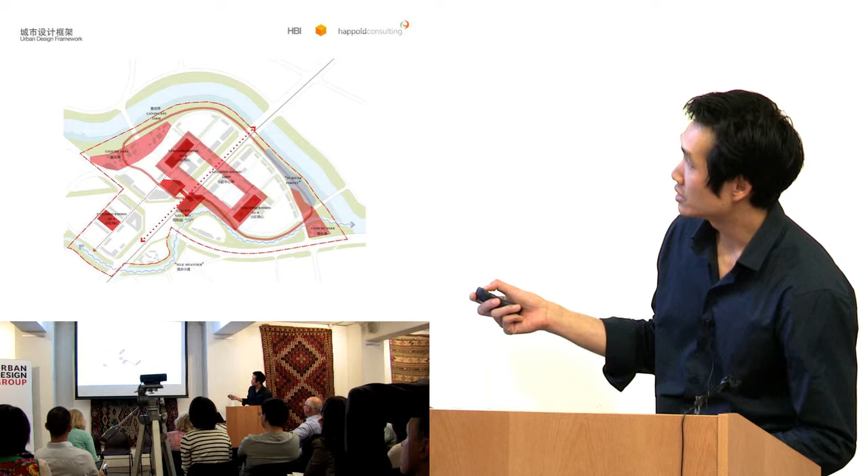Here's where we are on the site. At the confluence of two rivers, the loop, the three neighborhoods, and the metro station as the kind of conceptual bones of what we're trying to do here.

So running quickly to the CGIs, and not dispensing with the 200-page report.

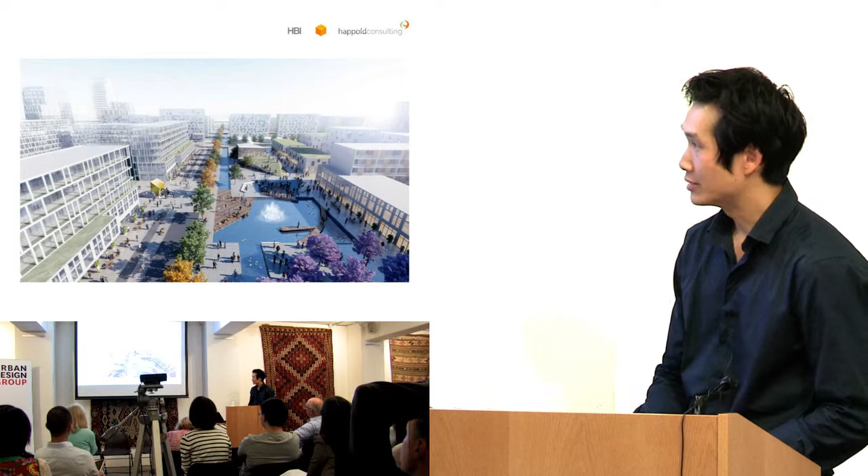This is one of the neighborhood hubs that we were trying to create, and each of the neighborhoods had a neighborhood hub where we reclaimed land for speculative development and safeguarded, or attempted to safeguard it for community use. This is where we pooled kindergartens and nurseries and wet markets, restaurants, in order to provide an interface for residents. And we recovered value by balancing the density on the neighboring parcels of land, which we think will increase in value because they have amenity like this.

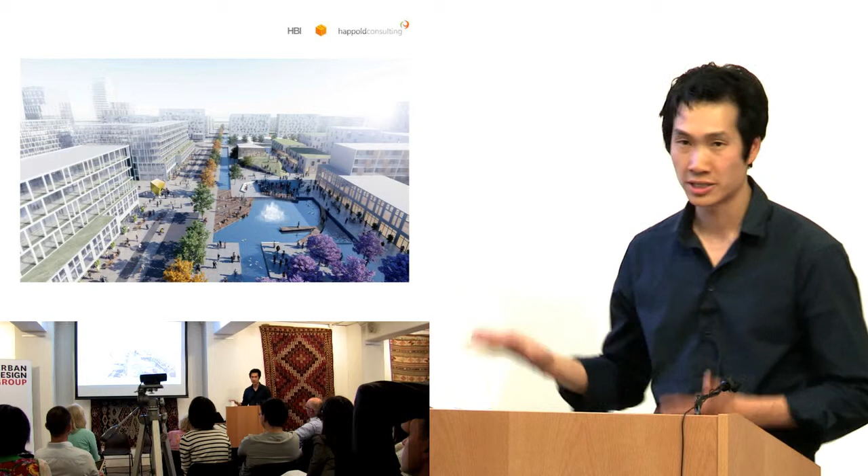The loop is effectively a linear configuration of enhanced public realm, fronted by active uses. Really, it's nothing more than that. But again, we're pushing against a kind of development model that imposes green setbacks and clear divisions of function between state-led infrastructure and development lots, which are the domain of private developers.

We've proposed a retail leisure district or sub-district along the river. This was an attempt to overcome a centrally dictated 50-meter buffer from the river, in which we're not allowed to build anything. So instead of bringing life to the water literally through built structures, we brought the park back into the district so that there was a feeling of waterfront activity.

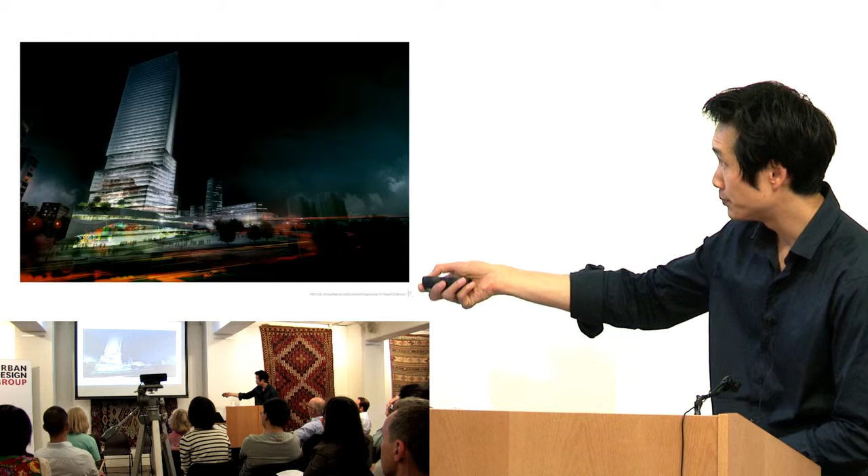The big reason for the master plan is the station, which can be seen here as an overground rail station. The train's zipping into it here.

The station, we inherited its location on an isolated lot overlooking a river. We couldn't really work with the location, but what we did say was that it had to be physically connected to adjacent sites so they could yield increases in development value, and we provided a large viewing platform over which you could view the river. So it's really taking opportunities and making opportunities from the constraints that we were given.

A large road runs through, and it's an arterial, a regional road that runs through the site, and this was to be fronted as a commercial strip, with larger scale retail and small office, home office developments.

We were pushed to up the density here, where our economic analysis was suggesting that perhaps the demand might flatten out. But we're happy to provide imagery which we know is a political tool and less of an image of what it will actually be like.

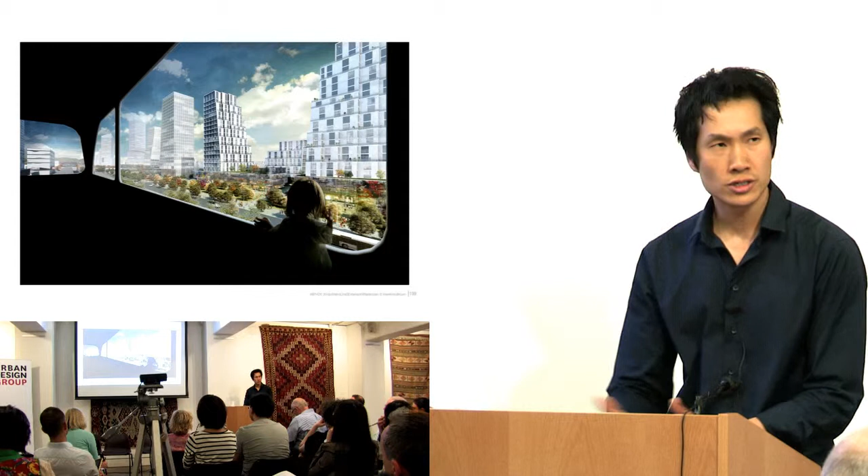In our master plan, we're looking to provide political tools for the local planning bureau to make arguments for the prioritization of this area. That's quite different from saying that it has to look like what we've drawn.

But what we've also said is that there are some very pragmatic elements to this which you should be adopting, and these we're imagining as step changes from the planning and development norms that you might normally get in Chinese city development. They are small, but we believe that they're very significant, and if we can affect policy and planning at that level, then we will have influence in a positive way.

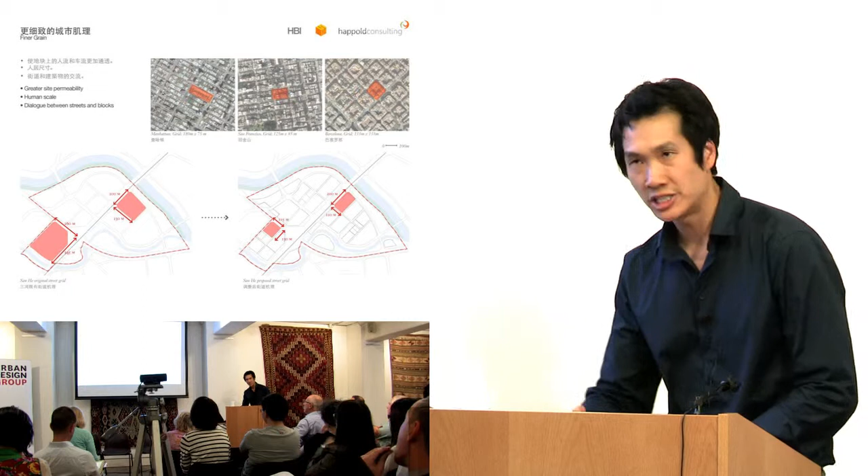Streets were made to work harder. Areas were more walkable, and the overall master plan is not seen as a spreadsheet of investor-led product, but places where people would be inhabiting.

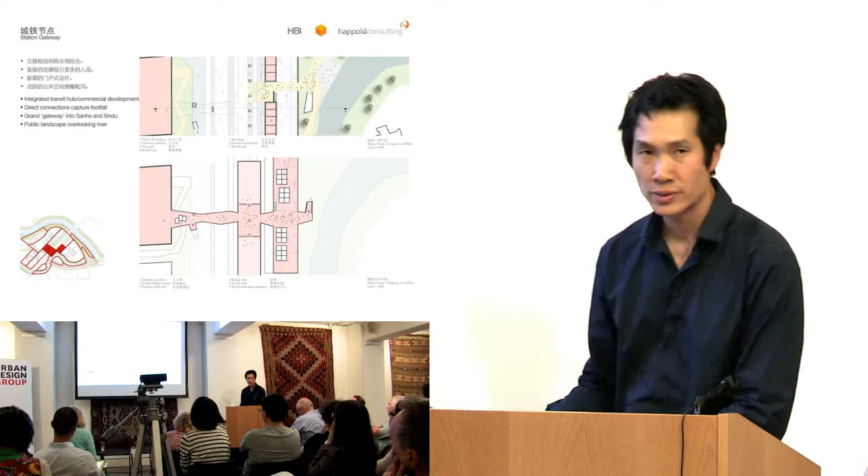As I mentioned in a previous slide, the station would have to be physically connected to adjacent plots in order to maximize the financial advantage.

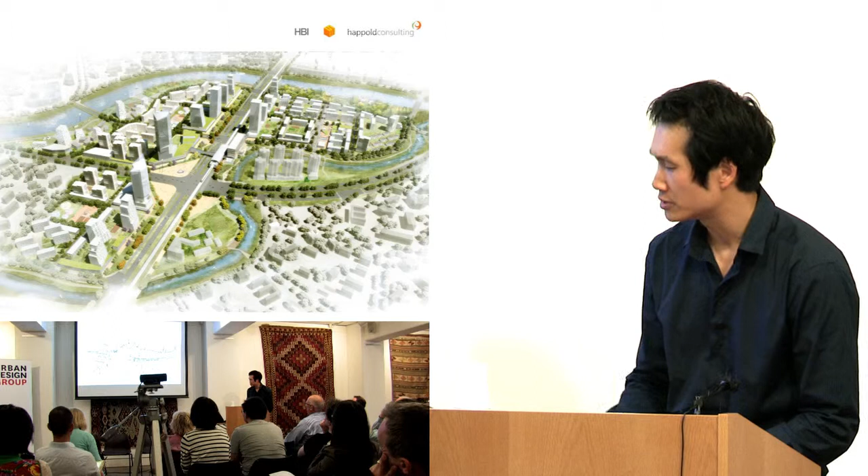And so this is the master plan as it will not look, and we were quite happy about that. But it is our hope that some of the principles embodied within that do get adopted. Thank you.